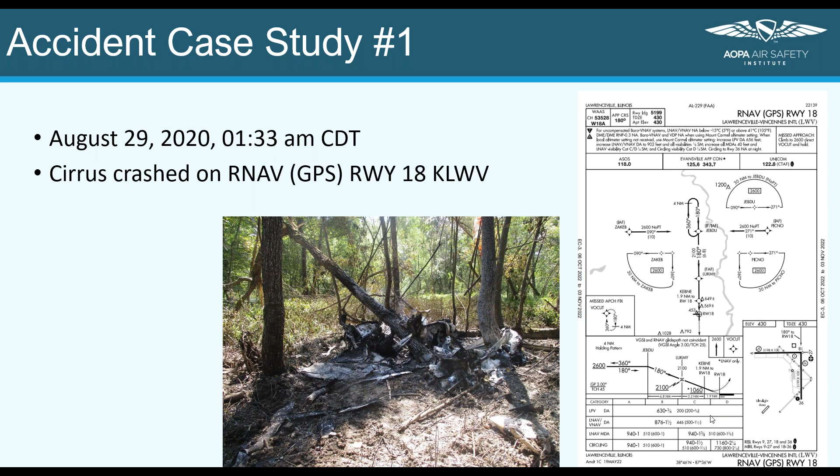The aircraft was piloted by a private pilot who had an airplane single engine land certificate with an instrument airplane rating, at about 667 hours of total time, 582 of that in PIC, 45 hours in make and model. And actually that make and model is in the accident aircraft. 107 hours in the last 90 days, 27 hours in the last 30 days. This is obviously a very experienced pilot, current, with a lot of experience in the aircraft.

In the 45 hours of make and model time, there were 9.1 hours of night flight and 1.8 hours in actual instrument time. He's also flown 7 approaches prior to the accident flight. He had his last instrument proficiency check back in April of 2020, so he was certainly current there. And when he purchased the aircraft, he also went through the Cirrus Embark training program, which consisted of 4.5 hours of ground training and 12.2 hours of flight training. So it's fair to say that he was pretty well trained in the aircraft. I think everything was good there, and he had a lot of experience and was not a rusty pilot or a rusty instrument pilot at all.

The aircraft was a 2007 SR-22 with a 310 horsepower engine. It had an Avidyne DFC-90 autopilot, and it was purchased two months prior to the accident flight. In those two months is when the pilot put in 45 hours of flight time.

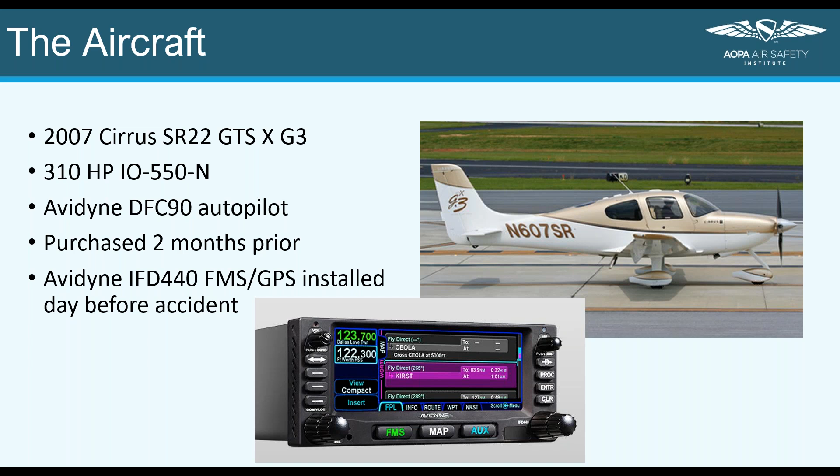The day before the accident, he flew down to Florida and had some avionics work done, swapping out a Garmin 430 WAAS box and replacing it with an Avidyne IFD 440, which he flew home with. He flew home the evening prior to the accident leg.

The weather at his destination airport - he departed out of Tampa, Florida, and went all the way up to Sullivan County Airport in Indiana, then was flying back south down to his home airport in Lawrenceville.

The weather in the early hours of the morning when he landed in Indiana - he made an instrument approach, but it was marginal VFR up there and marginal VFR down at his destination airport. As you can see, 6 miles in mist with a few clouds at 200 feet, broken clouds at 1,100 feet. The temperature dew point spread was 22 and 22, right there even with each other, which is an indicator that things are probably going to get a little bit worse.

And over the next half hour, it in fact did. Looking at the weather reports coming out of Lawrenceville over the next 37 minutes, up to the time of the crash, visibility was steadily decreasing, going from a broken ceiling at 1,100 to a vertical visibility of 200 and half a mile in fog. Calm winds, meaning nothing's going to be moving out there, so it's going to be very difficult to get in - it's very, very low IFR.

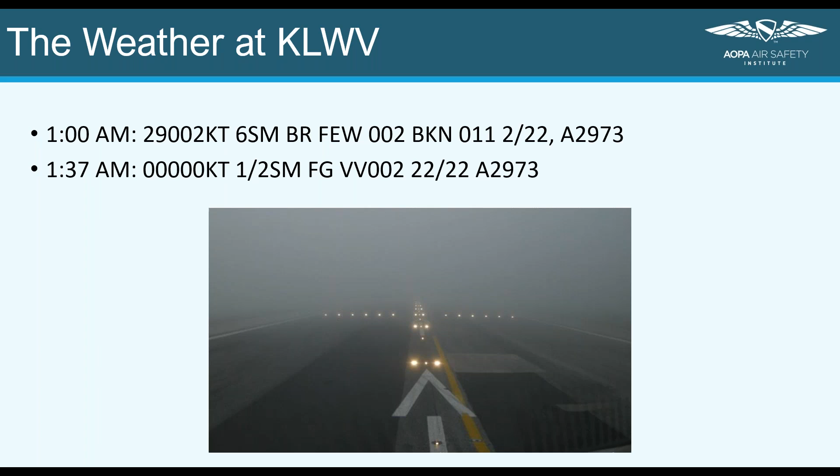He departed Tampa, Florida at about 8:45, 8:46 in the evening, and flew about 4.5 hours up to Sullivan County, where he refueled.

Sullivan County is on the eastern side of the time zone change, and he departed IFR at 2:11 Eastern time, flew across the time zone line, and was on approach into Lawrenceville.

When he contacted departure after taking off from the airport, they verified with him that he had the weather and the NOTAMs for Lawrenceville, then cleared him for the RNAV GPS runway 18, starting at the initial approach fix of JEBDU. Once he got established there, they terminated radar services and told him he could close his flight plan once he was on the ground at Lawrenceville.

There were no further communications between the pilot and ATC. Very quiet night, nothing to talk about - he's on his way into the airport.

The ADS-B data shows that he departed on a climbing left-hand turn. You can see in the upper right-hand corner of the picture, he departed southwest towards JEBDU. It's a little wide on the turn at the intersection, but then tracked to the final approach fix at LUKME and descended from 2,200 feet down to 600 feet.

And it looks pretty normal - I mean, who of us out there haven't overshot a fix and tried to get back on course? It looks like he was getting pretty close to it as he was coming in closer to the airport.

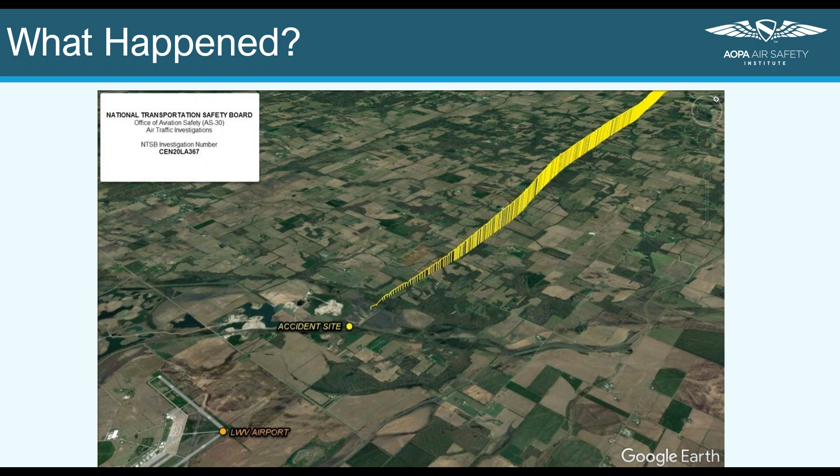It looks pretty normal all the way down until that last bit where he descended a little too low on that final approach. You can see the approach end of the airport. There's runway 18 down at the bottom of the page, and about 1.5 miles up is where that accident occurred.

So what went wrong? We really don't have a good idea here, other than we know the airplane descended too low. The avionics memory was corrupted, or was not available because of thermal and impact damage due to the fire. They couldn't retrieve anything, so we don't know exactly what he was looking at or doing in the last moments of the flight.

Because of the severity of the crash, flight control continuity was not confirmed, so we're not sure if he had usable controls all the way in. The track would seem to indicate he was not experiencing any issues with controlling the airplane or keeping it on a heading or altitude.

What they were able to look at in the airframe, the engine, and the propeller, they couldn't find any evidence of pre-impact malfunction or failure, so it should have been a pretty normal flight into the airport. Very few clues to the cause of the accident, which is why I think the NTSB started to focus on the avionics involved in the airplane and possibly also the time of the flight.

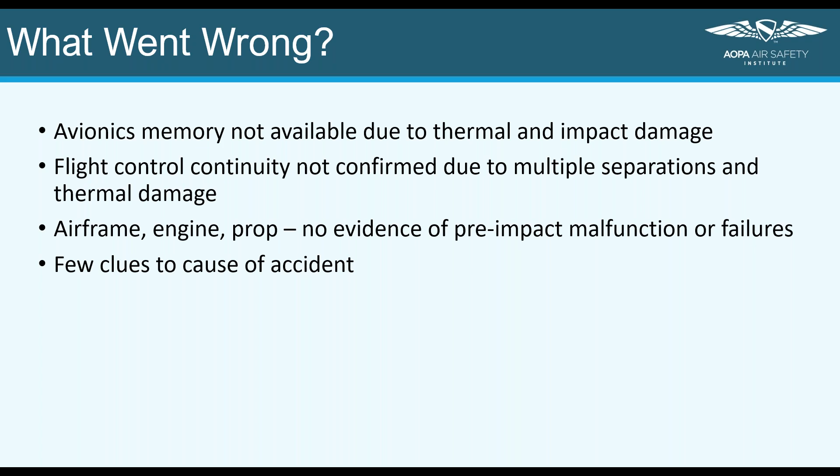In their determination of probable cause, they state that the pilot's controlled flight into terrain was a result of his failure to properly execute an instrument approach and maintain clearance from trees in night instrument meteorological conditions, and contributing to that accident was the pilot's unfamiliarity with a newly installed avionics system.

It's very possible that perhaps he was distracted by something on the panel there, trying to figure out the buttonology or knobology. Very difficult when you move from one system to another and you haven't taken a lot of time to do that. We're not sure exactly how much time or training he had with that.

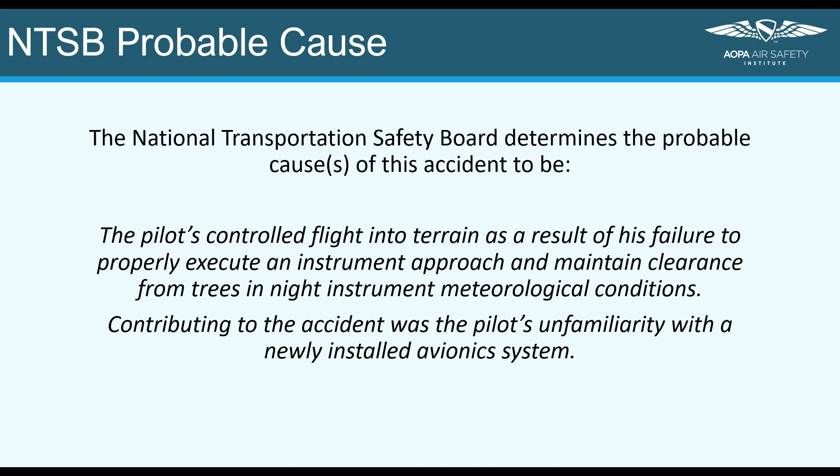And that's one of the questions we've got when we look at this accident. We try to consider what's going on. How much training did the pilot have on the new GPS? Was he actually able to spend some time playing with it?

Perhaps on the flight home from Tampa he was able to input his flight plan information. He made an instrument approach at his fueling stop, so he was able to load that, and he loaded the approach to come into his home base. So he had that information, but perhaps the buttonology was just different enough that he wasn't sure what was going on and had a question about it, might have been distracted by that.

It's also very possible that flying in at night and in fog, he might have seen glare or a reflection, and thought perhaps he was closer to the airport than he was.

And was there pressure to get home? This is an interesting situation. He flew down to Florida, had the avionics work done, flew back home, departed late in the day, 8:46 in the evening, flew all the way home, and then is trying to get back in.

Would it have made sense to stay overnight somewhere? Perhaps. We don't know what he had to do the next day. We're not sure if he was trying to make a meeting or something like that, but the question then becomes, why put yourself in a nighttime low IFR situation with new avionics?

In talking about this accident with some of my colleagues, there was a lot of questions about that. And in speaking with one of our You Can Fly ambassadors, Kay Sundaram out of California, when she gets a new piece of avionics, she takes some time with it. She spends no less than 5 hours flying with them in VFR conditions so that she can understand all the buttonology, what the steps are, how everything works, and what the interconnectivity is between all the boxes and other pieces of equipment in her aircraft.

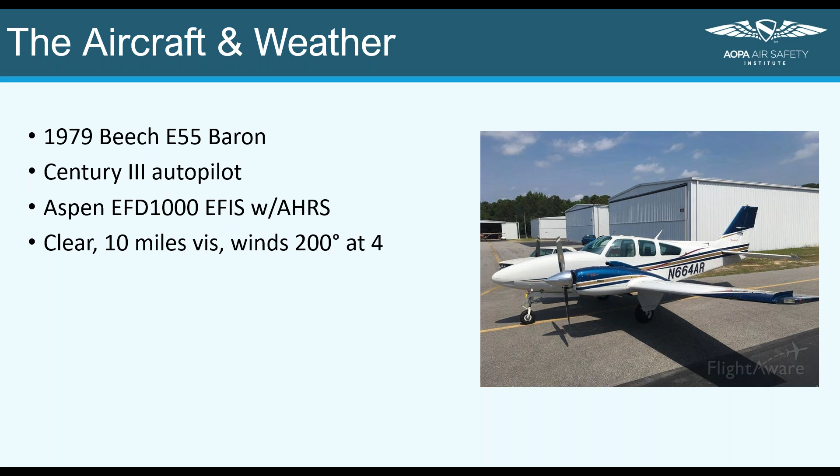But there's some things that happened ahead of that flight that we probably need to take a look at. During a previous cross-country flight, about 3 days prior to the accident flight, when he was flying with one of his friends, there was a failure light that illuminated from the AHRS system, and it stayed lit for about 12 to 15 minutes. It started up during the run-up, and then it did not extinguish itself until they had launched and were actually up in the air along on their flight. They discussed continuing the flight under VFR conditions so they wouldn't have to worry about a failure, and also the pilot enjoyed flying with his autopilot, and if that wasn't working, his autopilot wasn't going to work. But after 15 minutes, it went away.

They were able to make the systems work and continued on the flight, and on the return flight it did not give them any trouble at all. But after they landed, the light reappeared again for a few minutes after cycling the avionics prior to shutdown of the aircraft. So based on that, the pilot decided he would take the aircraft into his avionics shop and have them try to fix what was going on with his AHRS.

On the evening of the accident flight, the pilot visited the avionics shop and was told that they were still in the midst of the repair. It hadn't been completed yet - they were waiting on some information from the manufacturer. But if he wanted to take the plane, he could; the only thing that would be affected was that he couldn't use the autopilot. So it seemed like it would be okay to go fly the airplane.

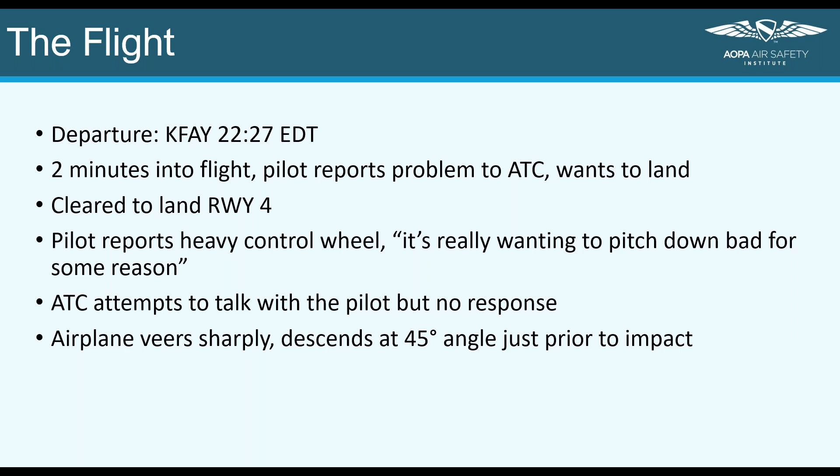When the NTSB went to do their investigation, there were no readable instruments because the cockpit had been crushed so badly. All they had was a fuel gauge they could look at. They were able to determine that the gear and the flaps were retracted. They weren't extended at all.

They looked at the trim tab actuators, and based on the positions of those, they indicated a full down tab on the left aileron, a little bit of nose left on the rudder, and more importantly, on the elevator trim tab, there was 10 degrees tab up, which equates to a full nose down trim. Obviously, he was trying to overcome those forces as he was trying to get back to the airport.

They were able to confirm that the flight controls were working. They had continuity all the way across, and so it didn't look like there was anything that had departed the aircraft prior to the crash.

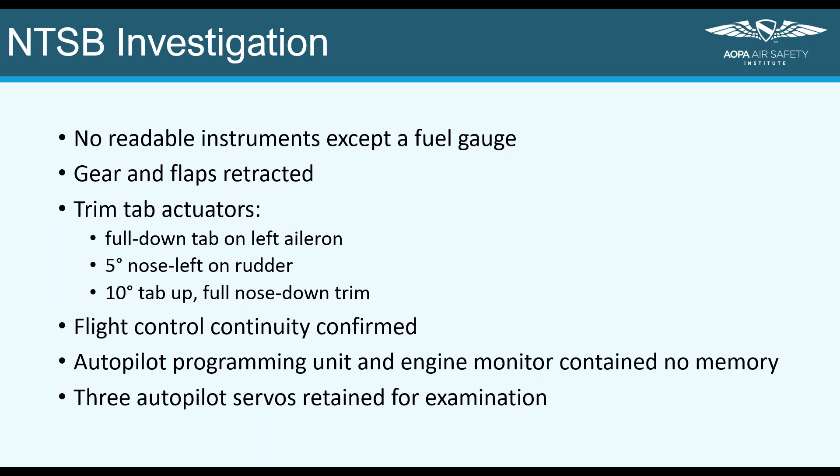They were able to salvage an autopilot programming unit and an engine monitor out of the debris, but those did not contain any usable memory either. They did find 3 autopilot servos that they examined, and those will play a part here in just a moment. We're going to talk about that.

One of the things they noticed as they were doing the investigation, was that there was an airworthiness directive applicable to this particular aircraft, and more specifically to the avionics displays in certain aircraft, which this one was listed - the E55 was listed in the AD and in the service bulletin.

This was prompted by reports of flight displays repetitively resetting in flight - they would go out for a few minutes, then come back in. There were enough reports that Aspen actually issued a mandatory service bulletin applicable to all units with a specific software version installed, requiring disabling the ADS-B in before the next flight in IMC, or at night, or within 25 hours time in service, whichever occurred first.

We're not really sure if this AD applied specifically to this unit, because the NTSB could not determine if the software was installed on that EFIS due to the damage sustained in the crash. The logbook did not show any entries indicating compliance, or indicating that it didn't need to be complied with. So we're not sure how that affected that airplane.

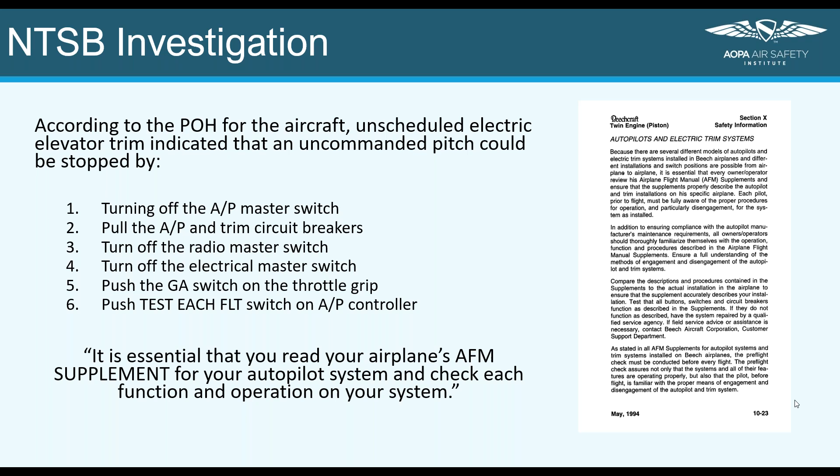It's important. When the NTSB conducted their testing, they found that the roll and trim servos did operate within design parameters, but the pitch servo did not. And that was very important.

When the pitch servo was powered, it engaged, but it wouldn't disengage when the power was cut off. So it's important that it disengages when power is reduced or removed from it. It would only disengage if they manually spun or bumped the clutch. They found that the electrical cable was sensitive and kind of intermittent - they think there may have been some broken pins within the cable, within the connection, resulting in an intermittent motor operation.

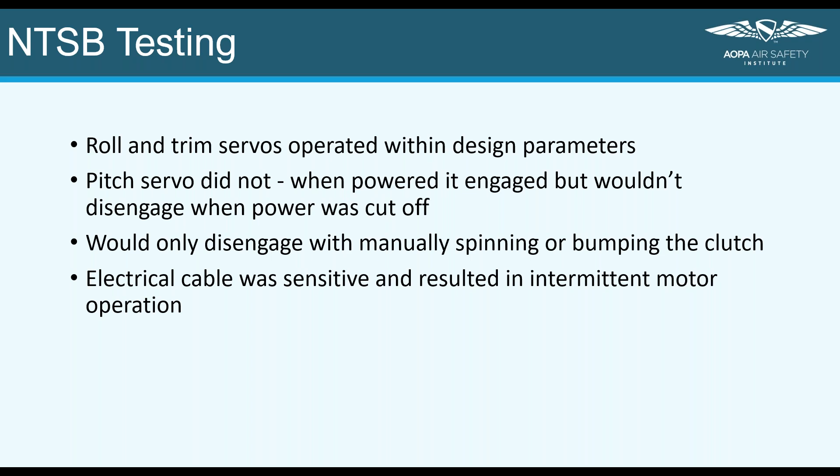In testing the tension of the pitch servo, they found it was 45 pounds, which is about 3 to 3.5 times as much force as required, compared to the 13 pounds needed.

They determined that when the servo was last serviced, it was removed from the airplane and the castle nut was over-tightened, tightened past where it had previously been, indicated by a mark that was off about 3/4 of the way around the bolt it was attached to. There was a new cotter pin installed, and the tape over it was not matching up with the previous mark.

In looking at the accident, they weren't sure if the pilot had engaged the autopilot and was trying to overcome it, or if he was testing it, or if it just turned on for some reason, maybe he bumped the switch or something like that. It's entirely possible. They're not sure what happened, they just know he was unable to overcome the force.

Going back to the AD I mentioned previously, the reason it was there was that certain EFIS systems with the 2.9 version of the software would reset. It would go out, show a light for a couple of minutes, then reset and come back on. That's why that service bulletin was issued.

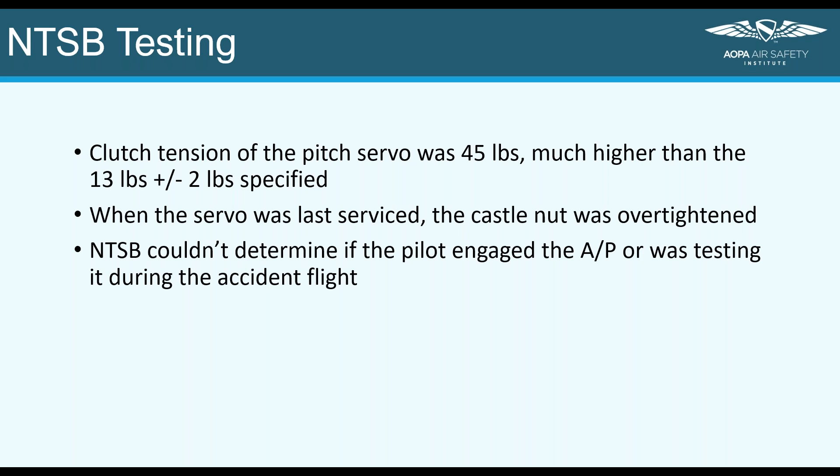The NTSB's probable cause in this accident was the pilot's failure to disengage an uncommanded nose down pitch input, and contributing to the accident was improper maintenance of the pitch servo, which would have precluded a physical override of the pitch servo. So, some questions to consider.

How often do you review and practice for an autopilot or runaway trim emergency? If you're a corporate or air carrier pilot, you go in for training every 6 months and run through a litany of emergencies, including these types. As general aviation pilots, we might do that annually if taking insurance-required training, or if we've set up a recurrency program ourselves.

But generally we check in with a flight instructor every 24 months for a flight review. Maybe we check in annually as we complete a phase of the Wings program, but is this something we look at? Do we take the time to go through those emergencies and run all the drills for them?

Another question related to this accident: is it really wise to fly an aircraft that's still undergoing service for a reported malfunction? When I have a malfunction on an aircraft I fly here at AOPA and I report it, if it's a downable item, the airplane is down, I don't fly it, neither does anybody else.

Coming back in to check it out and fly it just to get some currency might be—that wouldn't happen here, probably shouldn't happen in your flying, but that's a good question to consider. Is it worth the risk to go out and do that?

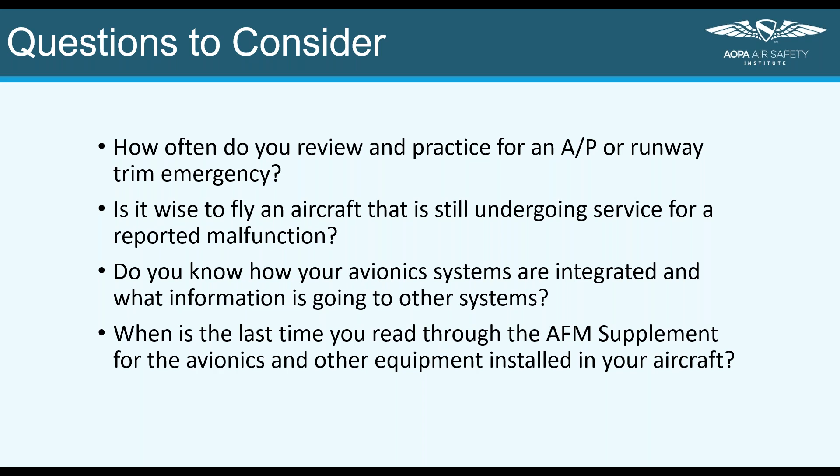Some of the takeaways out of this: we have problems when we talk about upgrading avionics. There is no real standardization across the OEMs. Every manufacturer does something a little bit different. Sometimes the buttons are a little different. Even between models in the same manufacturer, you can find things that are just a little bit different. You have to stop and think about it more than if it was the same thing all the way across.

That means our modern avionics require more management. It's really a change in our role when transitioning from analog to digital or glass equipment. We are more of a manager now, managing systems. We're having to think about what we need to do to get information from A to B to C and back again. Consequently, we're probably using the autopilot more to help manage integrated systems. Knowing what those integrations are is going to be key to keeping you out of an accident.

So how do you do this? Well, you can progress gradually, use only what you need when you need it, and then add more features as you get more and more comfortable. That's a good way to start.

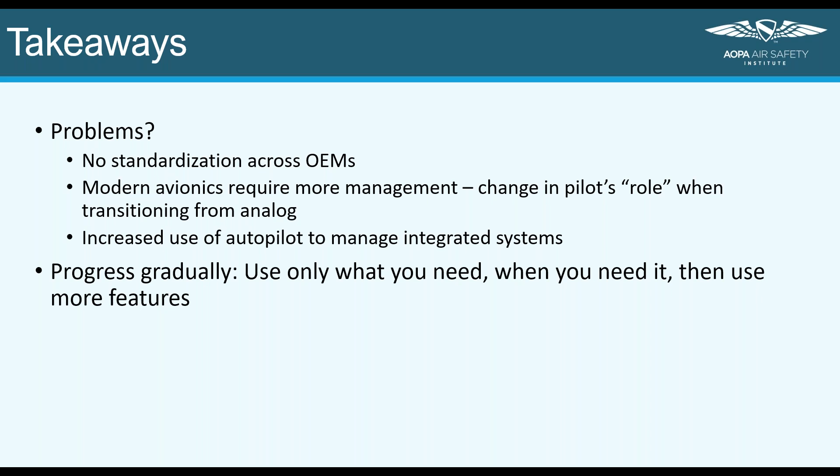You can also go into your AFM supplements, read those, talk to your avionics shop, talk to the tech, and practice. Remember, I talked about my colleague who uses a minimum of 5 hours VFR usage as her decision point whether she's going to take those new avionics into IFR or night flight. Get that practice through.

Most avionics manufacturers have apps you can put onto your smart device, tablet, or smartphone, and you can work with those. You can use simulators, you can take courses. There are lots of folks out there who specialize in various types of avionics, whether it's Avidyne or Garmin or any of the others. They're willing to help you out. They spend the time to get smart on that and then transfer that knowledge to you. You can also go out with a qualified CFI or another pilot you trust who has the same information or a similar system that you know, and use them to help you learn your systems.

Practice in VFR, absolutely. And then if you need to, get a ground-powered unit out and chair fly with it, plug it in, sit in the aircraft, move the knobs and buttons if you don't have access to a simulator or an app, and do that before you fly again at night or IFR.

When we talk about personal minimums, I mentioned my former boss who didn't fly at night. The ironic thing is he now flies at night for a major freight carrier. He was very, very strict about not flying at night because of his wife's desire not to fly at night. But that's something you should think about.